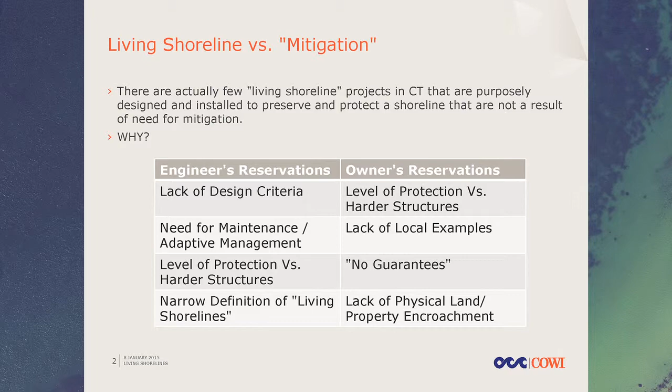And the owners: as a consultant, I deal with a lot of private homeowners in the state of Connecticut and some smaller commercial yacht club, those types of owners, not so much the municipalities, but we're talking about small spaces. And in order for these living shorelines to work, it needs to be more community-based, an entire street perhaps. Not just a 50-foot or 100-foot lot. It's certainly not going to provide that level of protection. So again, from an owner's perspective, what is a 5-foot wide stand of Spartina over a 50-foot lot really going to do for them for flood and erosion control?

There's a real lack of local examples. So when I'm talking to my client down in Greenwich and he asks, where else is this done? It's done in the Chesapeake. Well, that isn't really giving him a good level of comfort.

And again, when it comes back to design criteria, as an engineer for a hard structure, I can put on the drawings what that structure is designed to. It's much more difficult to do on a living shoreline project. And so there's less of a guarantee. Should the living shoreline fail, or there's need for more frequent maintenance than we anticipated, the owner's going to come back and say, "Hey, you didn't do what you told me you were going to do." Well, it's really hard for me to give you a guarantee in the first place.

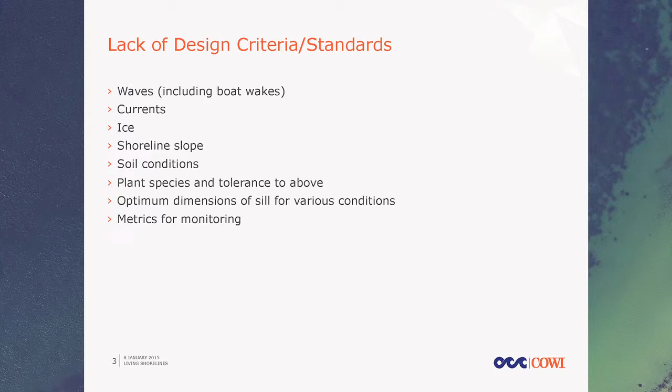I've had the pleasure of working with the New York State DEC over this past year. They have a Hudson River Sustainable Shorelines project that they've been working on for many years, and back in 2013 and 2014 they had a grant, and they commissioned Stevens Institute of Technology to undergo a forensic study of various types of living shoreline projects that were done up in the Hudson River estuary and parts of the upper New York City area in the Hudson River.

And I was part of an engineering panel that was involved in that project, commenting and reviewing the research and evaluation that the grad students at Stevens Institute were pursuing. And there were a few takeaways from that study. A number of common factors for failure were debris impacts. And again, that's something storm-related that a lot of times is not accounted for, but in Sandy, that was a huge impact, not only on living shoreline projects, but also structural solutions, seawalls and other shoreline structures.

Understanding the graded stone. A lot of the typical definition of a living shoreline is a sill. And what is the criteria for rock? The common failure mechanism was undersized rock. And again, it gets back to the design criteria. As a coastal engineer, if I'm designing a revetment, I could say my wave height is 3 feet, and that correlates to a stone size.

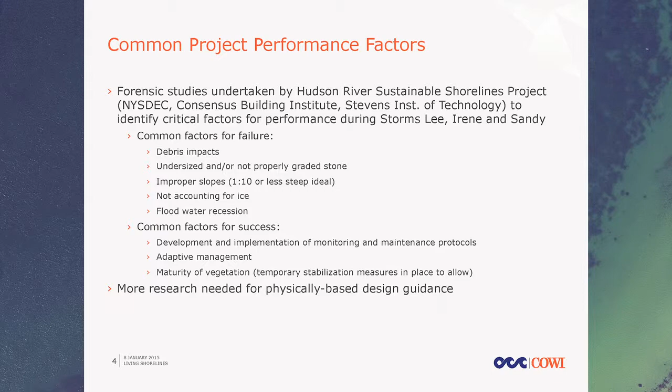Certainly, in some of these projects, Sandy came in a couple of months after that vegetation was just planted, and it didn't work. In some of the areas where the vegetation was more established, they thrived. And some of the ways to temporarily stabilize that vegetation, through coir logs or some other mechanism, so that it has an opportunity to root and thrive, was really part of the success for these projects.

But the underlying theme for this whole entire forensic study is that more research is needed. And that we need to install these projects, whether or not we have the design criteria now. We still need to work on these projects. We still need to get them installed so that we can monitor and understand the performance and be able to derive these physically based design criteria.

So I'd like to just talk about a few projects that I've been working on. This one is in Connecticut, Cedar Point Yacht Club, and I consider this to be, from my company's perspective, the first living shoreline project that we're proposing in Connecticut. Again, we've done a ton of mitigation projects, marsh creation, as a result of doing other work. But this one is an eroding bank in a somewhat stable, sheltered marina basin in Westport.

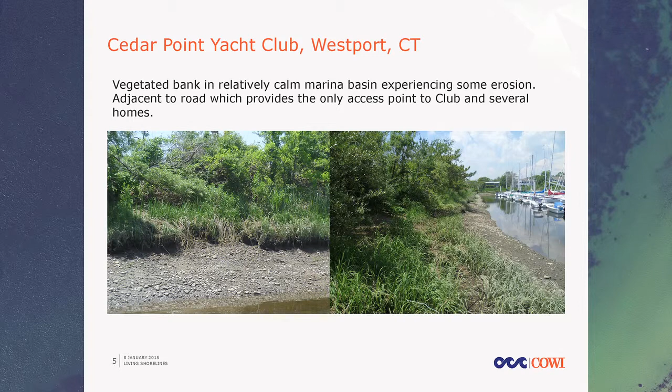But we substituted out the Gabion mattresses for a coir mattress. Again, 6 inches thick, very similar to the Gabion, but the coir mattress is biodegradable. So, at the end of 2 or 3 years at the most, that material will have degraded, and hopefully vegetation will be thriving throughout. And at the base of the bank, we would put a coir log again to help stabilize as vegetation grows.

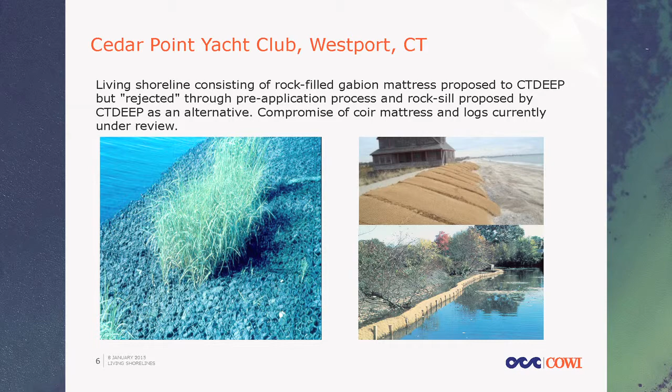So one of the other things I was asked to discuss was incentives for increasing the frequency of living shoreline proposals in Connecticut. Again, design criteria would be great, but I urge us not to wait until we have it. We need to be able to get these projects in, even if they're pilot studies, so that we can get the data we need to develop the design criteria. Certainly, general permit eligibility or shorter time periods for review would help. Allowances for adaptive management in the permits. The increased ability to try something more robust if there's repeated failures.

And I guess this gets back to the owner's reservations. We know that living shorelines could be susceptible to a lot of damage. How many times is someone going to replace a living shoreline or do that maintenance before we just say, hey, this is not the right site for that? And can we move on to something a little bit more robust, a riprap revetment or something like that? Certainly grants would help. I know a lot of people who would love some grant money to go ahead and do a pilot study. And most importantly, I think open-mindedness for potential alternatives and an expanded definition of what a living shoreline is.

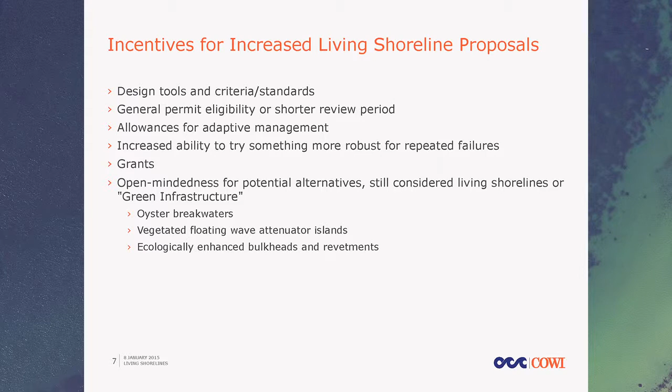And what they're using in New York City rather than living shoreline is green infrastructure, which encompasses a number of different types of solutions, including oyster breakwaters, vegetative floating wave attenuators, and ecologically enhanced bulkheads and revetments. And so just quickly, I'm going to run through a couple of projects that OCC is working on in other locales, which we consider to be green infrastructure or have some kind of living shoreline component.

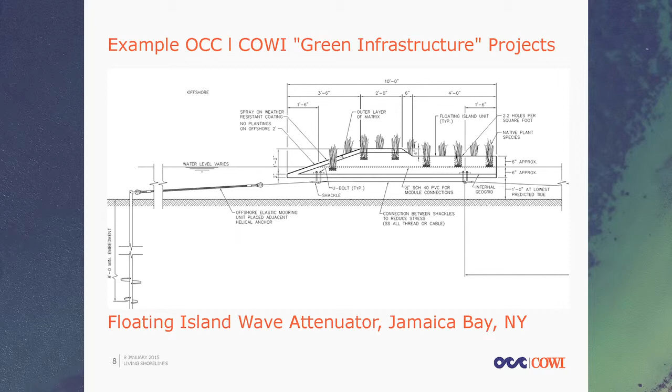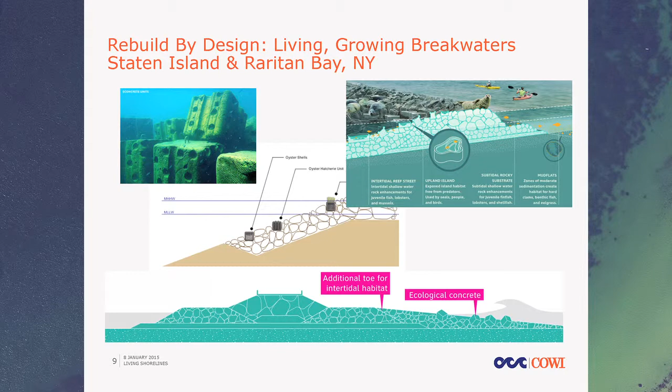This one is a floating wave attenuator island, and you can see there's a schematic view. This has actually been permitted for Jamaica Bay in New York City by the New York State DEC and the Army Corps of Engineers, and is likely to be installed sometime this spring. Rebuild by Design, living growing breakwaters in Staten Island. OCC was involved as the coastal engineer for this project, in which it's a traditional rock breakwater, but it's enhanced with ecological concrete to enhance oyster development and growth in the bay.

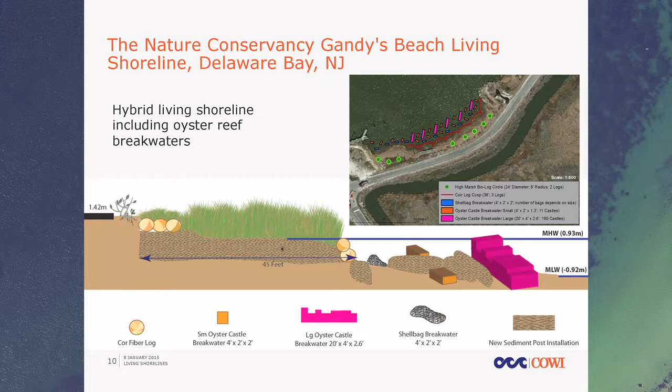And we're currently working for the Nature Conservancy down in southern New Jersey on Delaware Bay for a living shoreline, which has a very small component of actual tidal wetland vegetation creation through the use of coir logs and fill. But the majority of this project is an oyster breakwater in various configurations and types, from shell bags to the ecologically enhanced concrete to proprietary units called oyster castle, so almost like Legos that build up to form mini breakwaters.

And we're in the infancy of this project, but we have had good feedback from the regulatory agencies down there that this is considered a living shoreline and likely to be eligible for their new general permit down in New Jersey. And so again, I urge especially the regulators in this room to be more open-minded about what they consider a living shoreline. I think that's it.